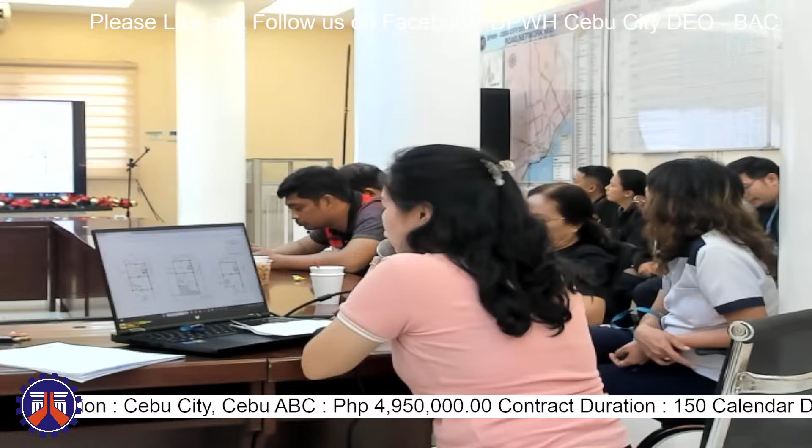For its scope of works, it contains the installation of the built-in cabinet at ground floor, office space, and installation of wall partitions also at ground floor, second floor, and third floor level.

And next is removal and replacement of ceiling incorporating electrical works, and then removal and replacement of CRs, all CRs from ground floor to third floor. And then extension of the second floor level for Barangay Captain's Office.

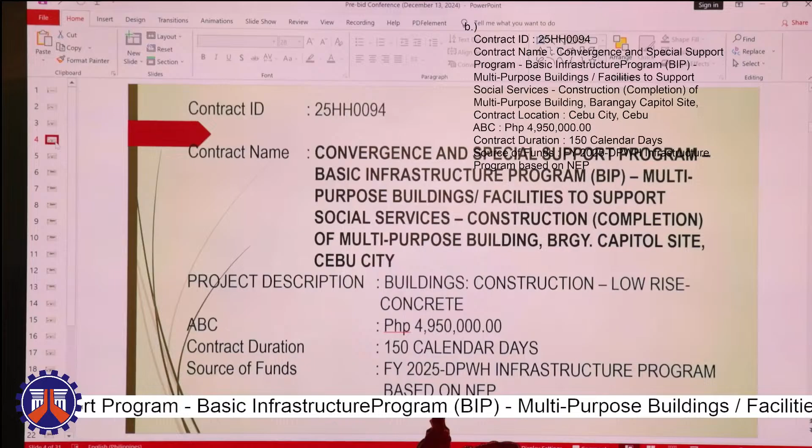So that's all for Barangay Sambag Dos. Next project, contract ID 25HH0094 with contract name, Convergence and Special Support Program, Basic Infrastructure Program, multipurpose building facilities to support social services, construction completion of multipurpose building, Barangay Capitol Site, Cebu City. Project description, building construction, low-rise concrete, with approved budget contract, 4,950,000. Contract duration is 150 calendar days, and its source of funds will be FY 2025 DPWH Infrastructure Program based on NEP.

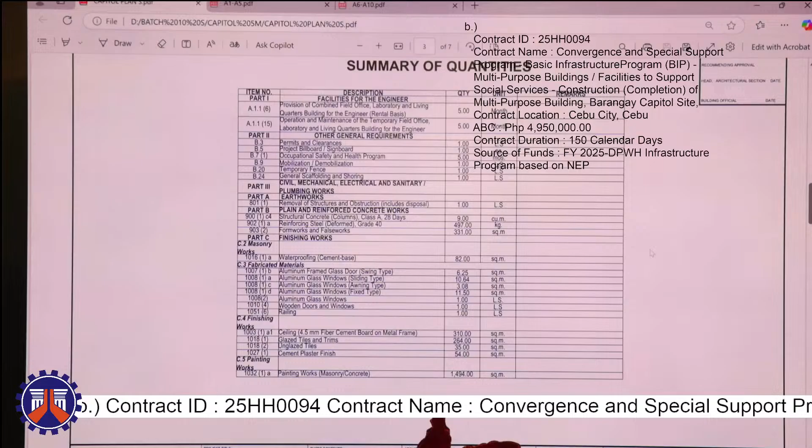So the location of this project is the Barangay Capitol Site, Barangay Hall. Its main scope of works, installation of aluminum frame glass doors, swing type, aluminum glass windows, sliding type, aluminum glass windows awning, aluminum glass windows fixed type, and aluminum windows, wooden doors and railings at the roof deck.

So it's an enclosed area. Currently it's open here, more connection to the existing barangay hall. Installation of railings at the third floor level. That's all for Barangay Capitol Site.

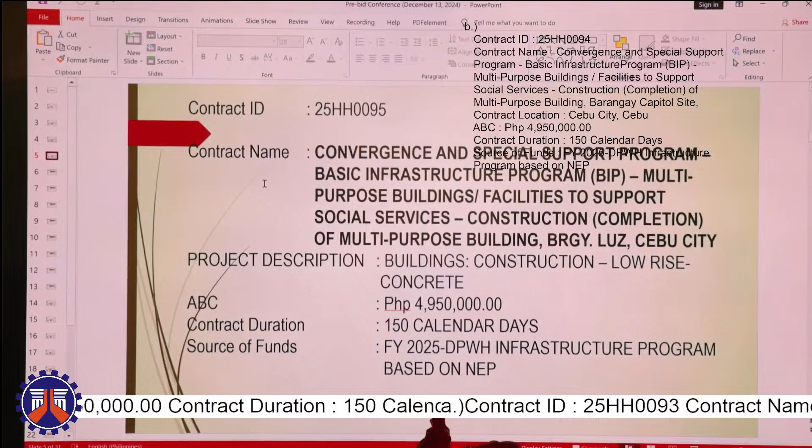Next, contract ID 25HH0095 with contract name, Convergence and Special Support Program, Basic Infrastructure Program, multipurpose buildings facilities to support social services, construction completion of multipurpose building, Barangay Luz, Cebu City. With project description, construction low-rise concrete. With approved budget contract, 4,950,000. Its contract duration is 150 calendar days, and source of funds will be FY 2025 DPWH Infrastructure Program based on NEP.

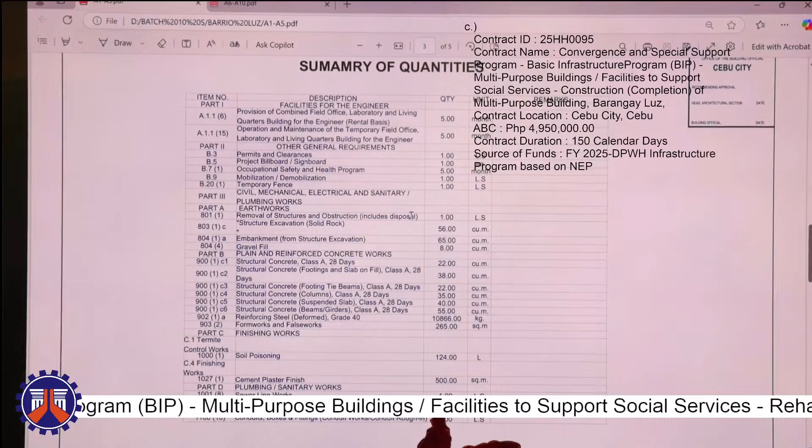For Barangay Luz, the project is located at the Barangay Luz Barangay Hall. So, its main scope of works, removal of existing structures and obstruction, structure excavation, solid rock, embankment from structure excavation, and gravel fill. And for concrete works, you have structural concrete, footings and slab, structural concrete footing tie beams, structural concrete for columns, structural concrete for suspended slab, and structural concrete for beams and girders.

Also for architectural works, we have the cement plaster finish, and then the installation of plumbing and sanitary works for sewer lines, cold water lines, also for electrical works.

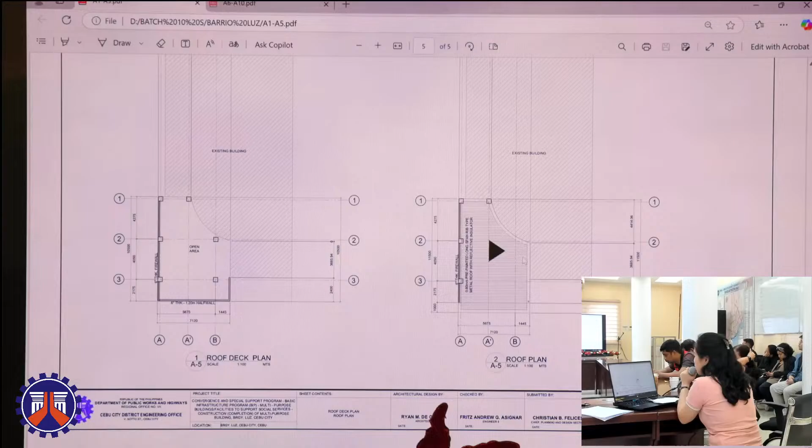So this is an extension building. Ground floor, second floor, and third floor plan, which has an office space. And then the roof deck plan. Also the roof plan. That's all for Barangay Luz. Thank you.

Good morning. I'm here to discuss our next project with contract ID 25HH0096. Contract name, Convergence and Special Support Program, Basic Infrastructure Program, BIP, access roads and/or bridges from national roads leading to major strategic public buildings facilities. Construction of road, Barangay Pulangbato, Cebu City.

Project description, roads construction, PCCP. With the approved budget for the contract, 4,950,000. Our contract duration, 72 calendar days. Source of fund, FY 2025 DPWH Infrastructure Program based on NEP.

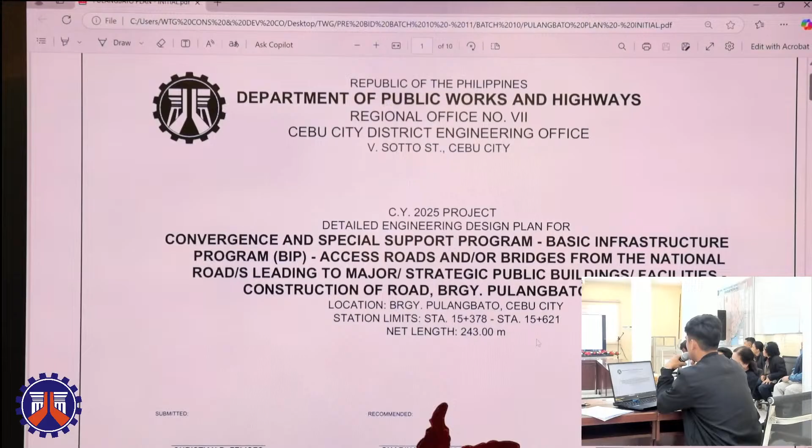Here's our plan. Our station limits starts at 15 plus 378 to station 15 plus 621, with a net length of 243 meters.

The start of our project is the end of our 2024 Pulangbato FMR, and the end of our project is the existing concrete road going to Barangay Guba. We have our exact coordinates for the start and end of our project.

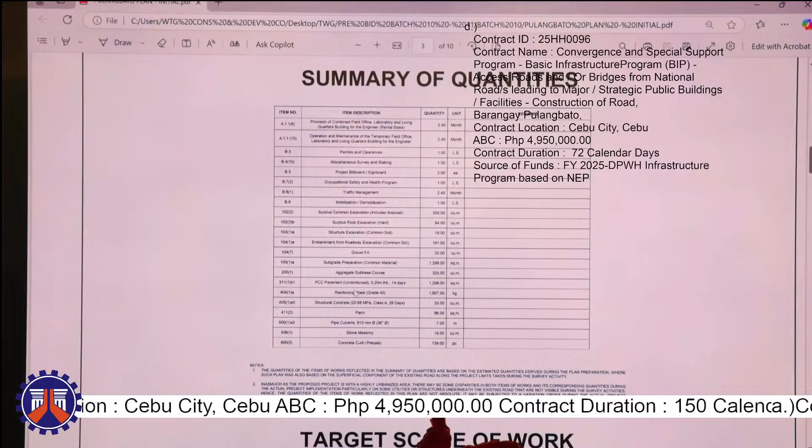These are our scope of works, the items involved in our project. We have surplus excavation, structure excavation, embankment, gravel fill, subgrade preparation, aggregate sub-base course, PCCP 0.20m, 14 days, reinforcing steel grade 40, and structural concrete for our line canal. We also have paint for our curb, pipe culverts for our cross drain, stone masonry, and concrete curb precast. These are the general notes and technical specifications of the items involved in this project.

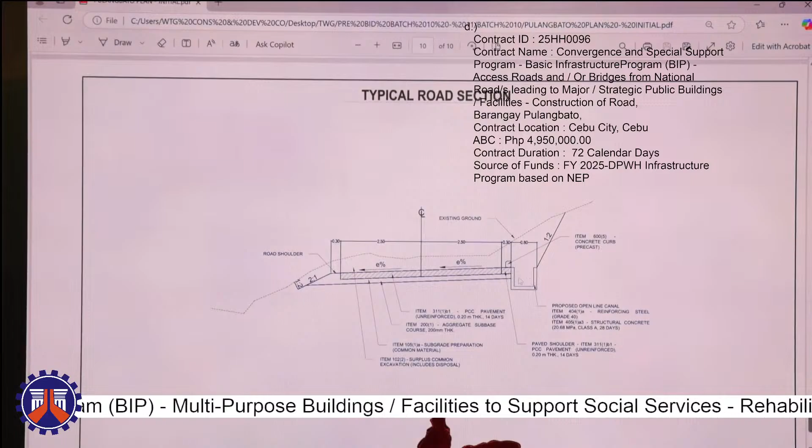Lastly, our typical road section. We have our concrete pavement here and our line canal at the right side. Okay, that's all for Pulangbato.

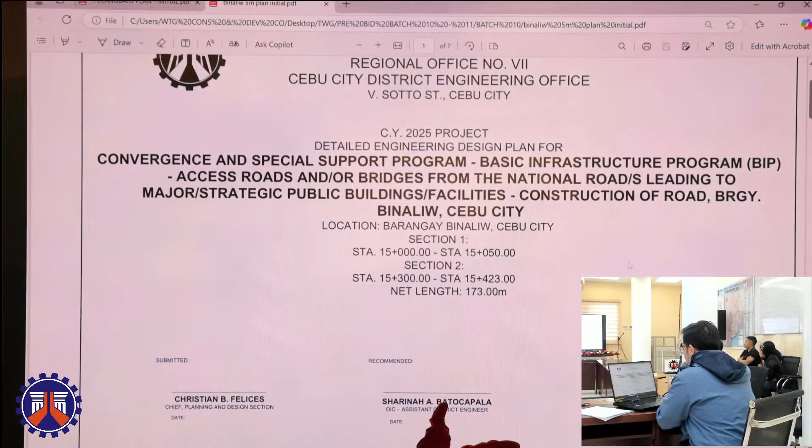This project involves two sections. Section 1 has station limits of 15,000 to 15,050, only 50 meters. Section 2 has station limits of 15,300 to 15,423, with a total net length of 173 meters.

Here we have the summary of quantities. First, removal of actual structures or obstruction, PCCP 0.23 meters thick, surplus common excavation, structure excavation, pipe culvert and drain excavation, embankment from roadway excavation, gravel fill, subgrade preparation, aggregate subbase course, PCCP pavement 0.25 meters thick, 7 days.

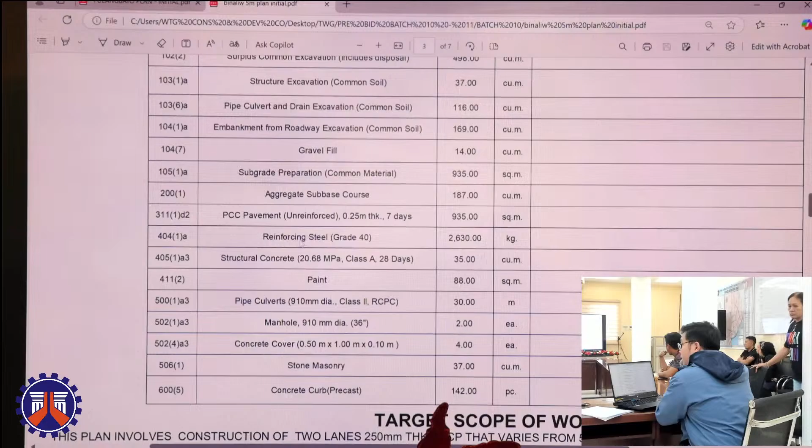For the drainage, we have reinforcing steel grade 40, structural concrete 20.68 MPa, class A, 28 days. We also have paint, pipe culverts, manhole, concrete cover, stone masonry, and concrete curb.

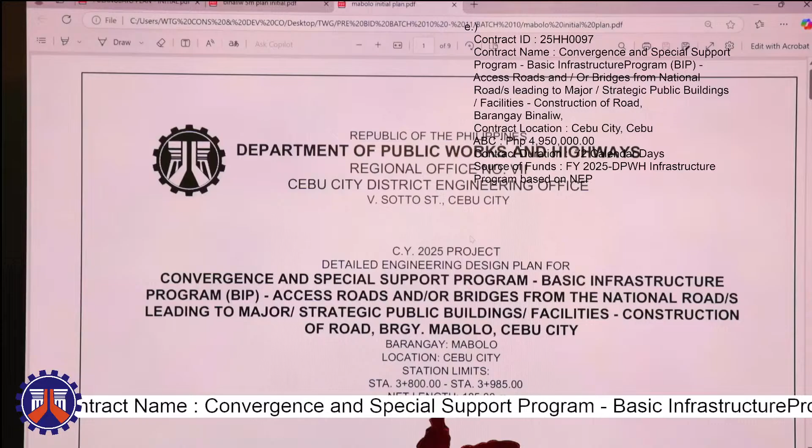Next, with contract ID 25HH0098, Convergence and Special Support Program, Basic Infrastructure Program, access roads and/or bridges from the national roads leading to major strategic public buildings, facilities, construction of road, Barangay Mabolo, Cebu City, with an ABC of 4.95 million and a contract duration of 72 calendar days.

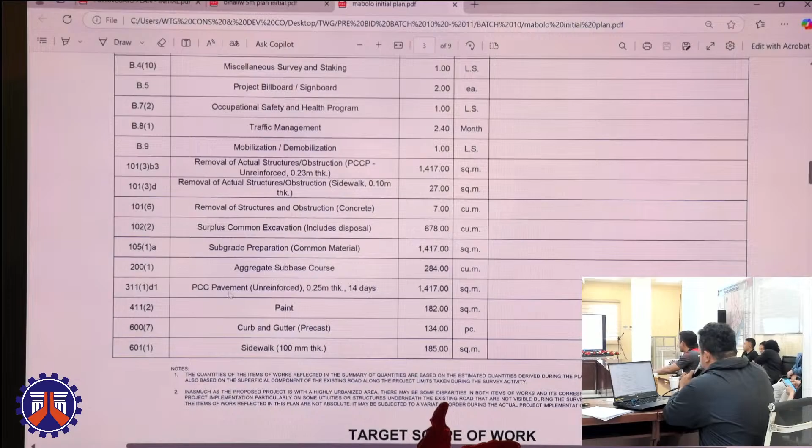This is the summary of quantities of the project. The major scope of work being removal of PCCP, removal of existing sidewalk, removal of existing concrete, surplus common excavation, subgrade preparation, aggregate subbase course, PCCP, paint, curb and gutter, and provision of sidewalk.

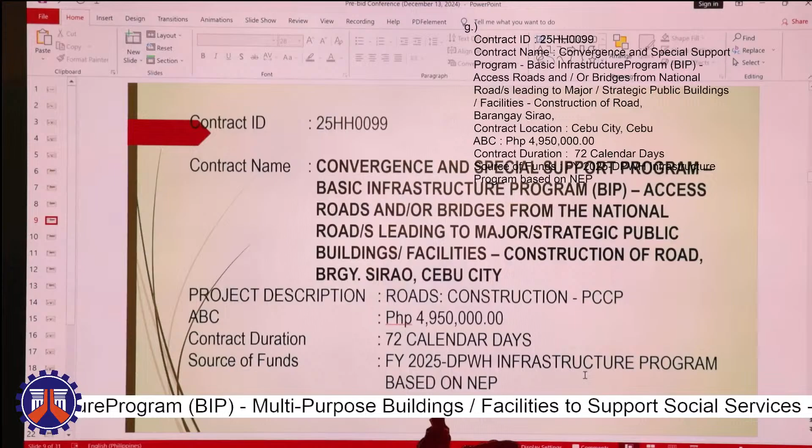Good morning, everyone. I'm here to discuss the project with contract ID 25HH0099, contract name Convergence and Special Support Program, Basic Infrastructure Program, access roads and/or bridges from the national roads leading to major or strategic public buildings or facilities, construction of road, Barangay Sirao, Cebu City. Its project description is roads construction of PCCP with an approved budget of 4,950,000 pesos. Its contract duration is 72 calendar days, and its source of funds is FY 2025 DPWH Infrastructure Program based on NEP.

So here is our plan, and its station limits start from station 17 plus 800 until station 17 plus 975, with a net length of 175 meters.

Here is our summary of quantities with its major scope of works, including surplus common excavation, structure excavation, pipe culvert and drain excavation, gravel fill, subgrade preparation, aggregate subbase course, PCCP 0.2 meter thick, 14 days, reinforcing steel grade 40, structural concrete, paint, pipe culverts, stone masonry, and concrete curb precast.

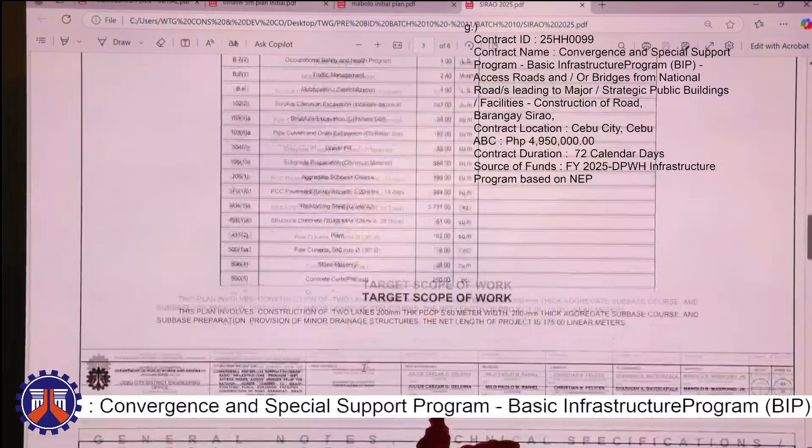Here you will see the general notes and technical specifications included in this project.

And this is our typical road section. You can see there is a proposed drainage for both sides of the road, and its carriageway width is 5.6 meters.

So the next project I will be discussing is the project with the contract ID 25HH0100, with its contract name Convergence and Special Support Program, Basic Infrastructure Program, Access Roads and/or Bridges from the national roads leading to major or strategic public buildings or facilities, construction of road, Barangay Cambinocot, Cebu City.

Project description is roads construction PCCP. Approved budget is 4,950,000 pesos. Its contract duration is 72 calendar days, and its source of funds is FY 2025 DPWH Infrastructure Program based on NEP.

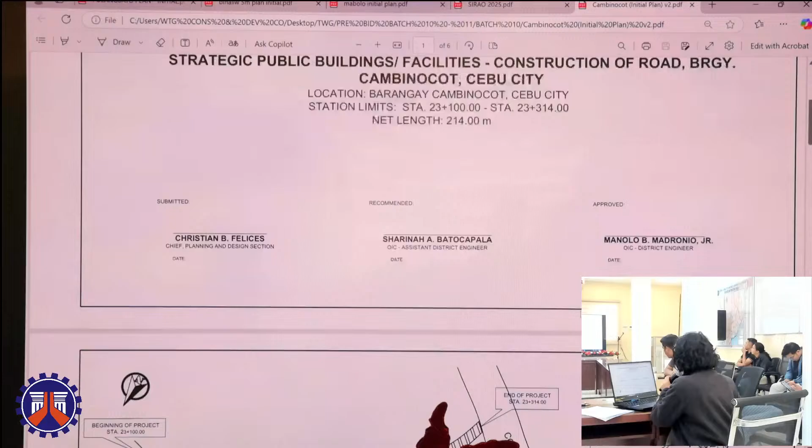So here's our plan. Its station limit starts out from 23 plus 100 until 23 plus 314, and its net length is 214 meters. Here is the location of our project, as well as its geotagged photos for easy navigation to our project.

The major scope of works for this project includes removal of RCPC, surplus common excavation, structure excavation, pipe culverts and drain excavation, gravel fill, subgrade preparation, aggregate sub-base course, PCCP 0.2 meter thick, 14 days, reinforcing steel grade 40, structural concrete, paint for our curb, pipe culverts, stone masonry, and concrete curb precast.

And here is our general notes and technical specifications included in the project.

Lastly, here is our typical road section. There is a drainage on the right side of the road, and yeah, that's all.

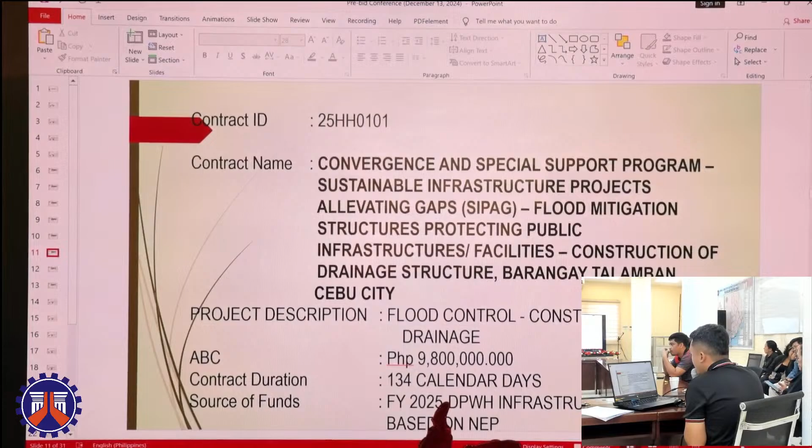With an ABC of 9,800,000 with a contract duration of 134 calendar days. Source of funds is FY 2025 DPWH Infrastructure Program based on NEP.

Moreover, for the plan, we have for line 1, station limits from 00 to 0 plus 394. For line 2, we have station limits of 00 to 100 meters with a net length of 888 meters. So for the next page, we have the geotag photos.

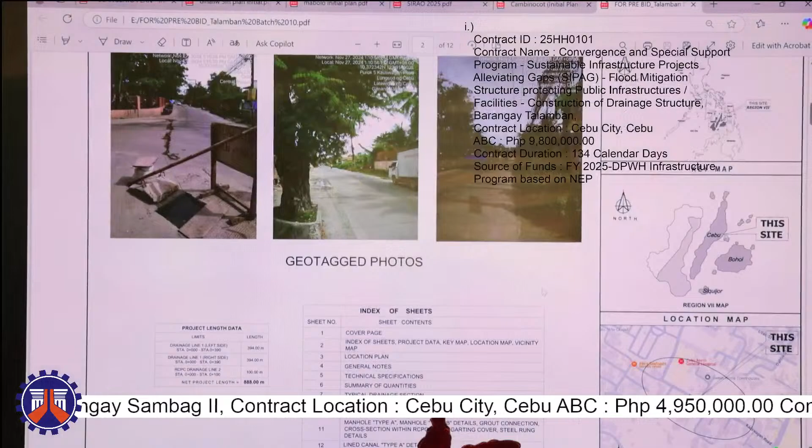And as you can see here, we have the vicinity map wherein you can locate the project in Kauswagan Road at Cebu North General Hospital.

So furthermore, for the major scope of works for this project, we have item 8011, removal of structures and obstruction, reinforcing steel, structural concrete, metal frames and gratings, pipe culverts and drain excavation, embankment, pipe culverts 910 mm diameter, manhole, inlets, concrete cover.

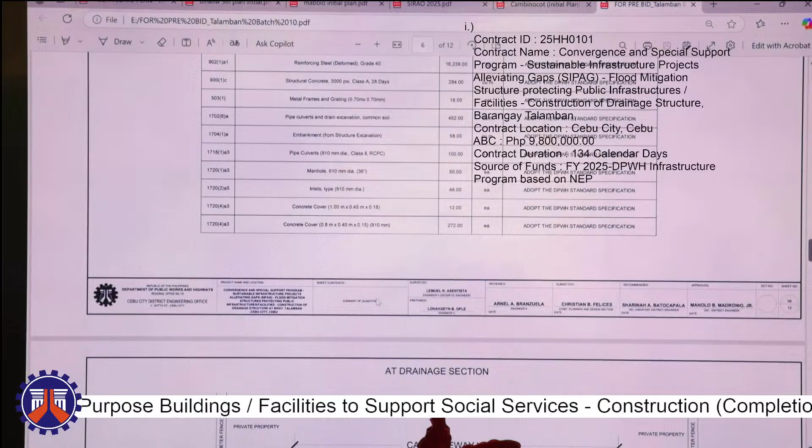And for the typical drainage section details, we have here. And also for the typical sections, we have for the manhole and for the lined canal. So that would be all for this project.

Next, we have Barangay Mabolo. Pit-os. Okay.

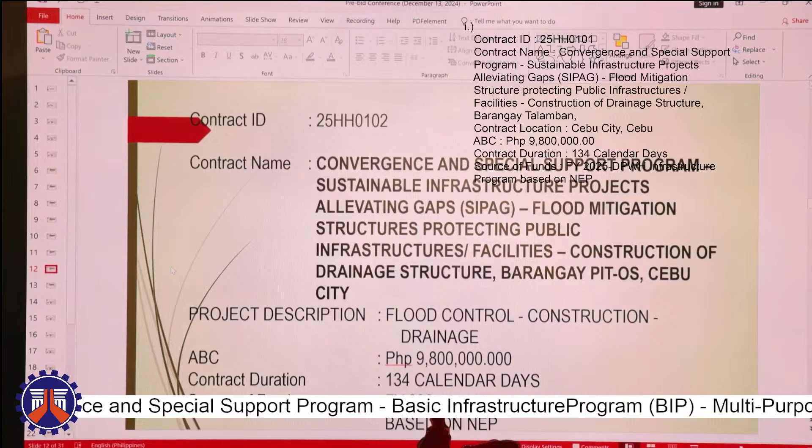Good morning, everyone. I will be the one to discuss contract ID 25HH0102, Convergence and Special Support Program, Sustainable Infrastructure Projects Alleviating Gaps, Flood Mitigation Structures Protecting Public Infrastructures Facilities, Construction of Drainage Structure, Barangay Pit-os, Cebu City. Project description, flood control construction drainage with an ABC amount of 9.8 million.

Contract duration, 134 calendar days. Source of funds, FY 2025 DPWH Infrastructure Program based on NEP.

So for this project, the location is Barangay Pit-os, Cebu City, mainly sa Villa del Rio 2. So we have drainage line 1 and 2. For line 1, we have 393 meters. Line 2, 390 meters, total of 783.

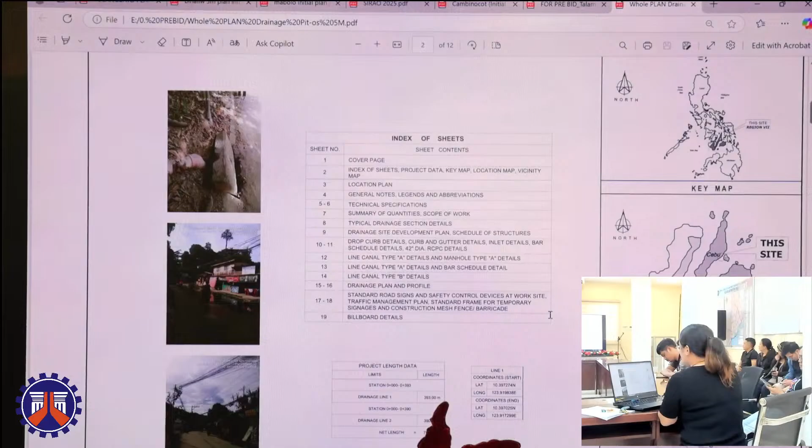So the coordinates for the location is also provided. So mo ni siya ang location sa project, from Villa del Rio 2 going to Pulang Bato Bridge.

Then for the scope of work, we have structural concrete, reinforcing steel, metal frames and gratings, curb and gutter, shoring, manhole inlets, and concrete cover for the line canal as the design of this project. The details of the line canal is also provided in the plan. So that's all.

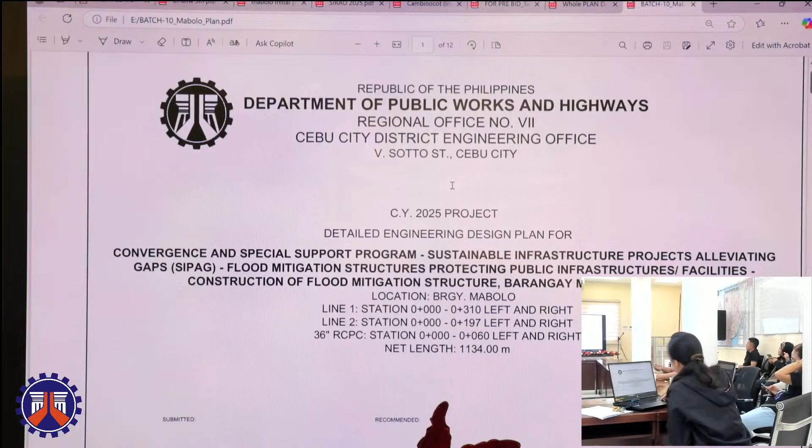This is our plan for Barangay Mabolo. Line 1 station starts from 0 plus 0 to 0 plus 310 on both sides. Line 2 station starts 0 plus 00 to 0 plus 197 on both sides. And for 36 inch RCPC, station starts from 00 to 060 left and right, with a total net length of 1,134 meters.

This is our location with geotagged photos, and the site is located along 10F Gochan Street and Tres Borces Padres Street.

This is the general notes and technical specifications, and for the main scope of works: removal of structures and obstructions including disposal, reinforcing steel deformed grade 40, structural concrete 3000 psi class A 28 days, metal frames and grating, curb and gutter precast, sidewalk, pipe culverts and drain excavation, common soil, embankment from structure excavation, pipe culverts, manhole 910mm dia, and inlets, concrete cover for line 1 and concrete cover for line 2.

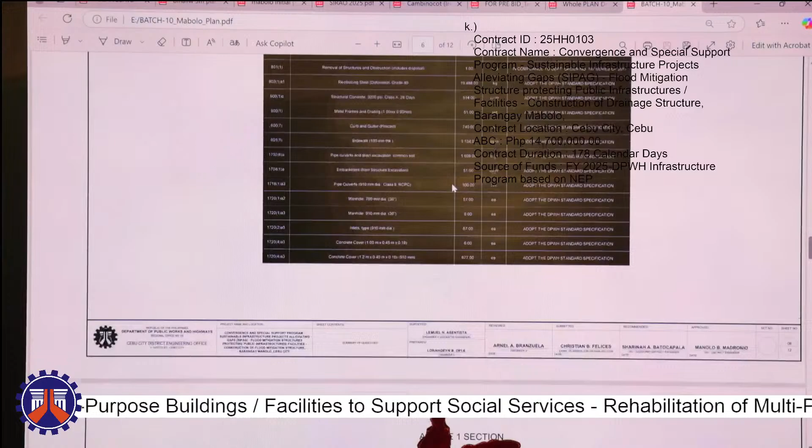This is our typical drainage section details for line 1 and 2, and this is for the 36 inch RCPC section. And this is our road work, road signs and safety. And this is our manhole details and concrete cover for the line canal. Thank you.

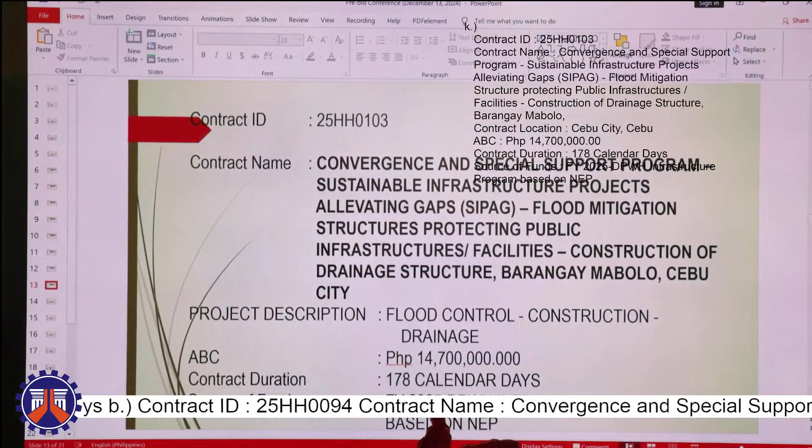Next project, contract ID 25HH0104, contract name Convergence and Special Support Program, Basic Infrastructure Program, BIP, multipurpose building facilities to support social services, rehabilitation of multipurpose building, Barangay Bacayan, Cebu City, with project description building repair. ABC amount is 4,950,000. Contract duration is 150 calendar days, and source of funds will be FY 2025 DPWH Infrastructure Program based on NEP.

For Barangay Bacayan, the project will be at the Barangay Bacayan Gym or covered court.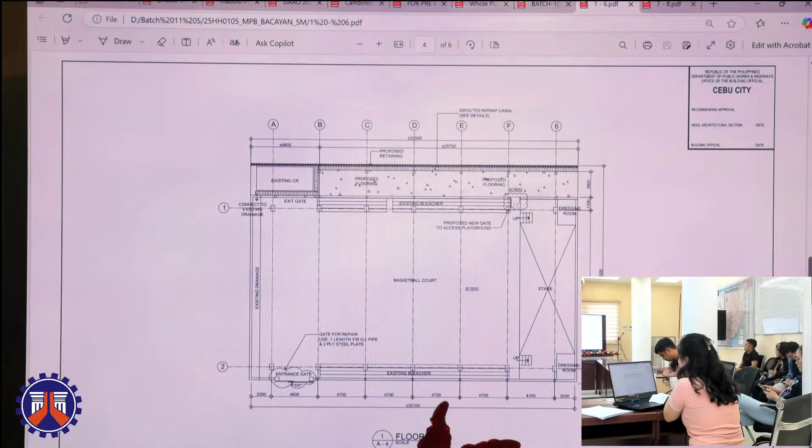Also, gate connecting to existing - sorry. Also, removal and replacement of the existing main gate of the covered court.

And then rubberized painting for the whole area of the basketball court. Next will be the installation of louver at the rear elevation. And painting of the steel trusses. That's all for Barangay Bacayan.

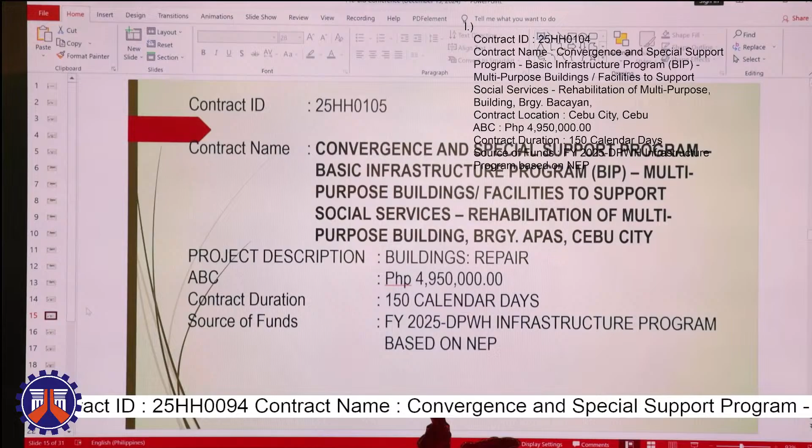Next is contract ID 25HH0105. Contract name: Convergence and Special Support Program, Basic Infrastructure Program, Multipurpose Buildings, Facilities to Support Social Services, Rehabilitation of Multipurpose Building, Barangay Apas. Project description is building repair. ABC amount is 4,950,000. Contract duration is 150 calendar days. Source of funds will be FY 2025 DPWH Infrastructure Program based on NEP.

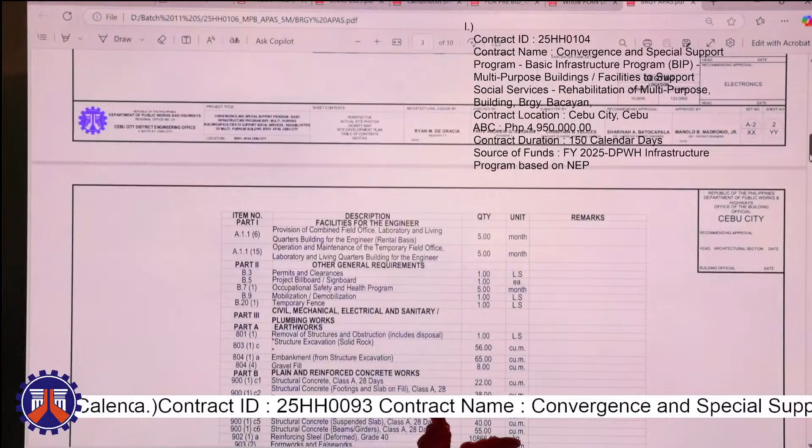The project is located at Barangay Apas, Barangay Hall. There will be installation of roll-up doors and installation of walls at the ground floor or parking space area. Also painting of interior and exterior walls, ground, second, third, and fourth floor, up to roof deck.

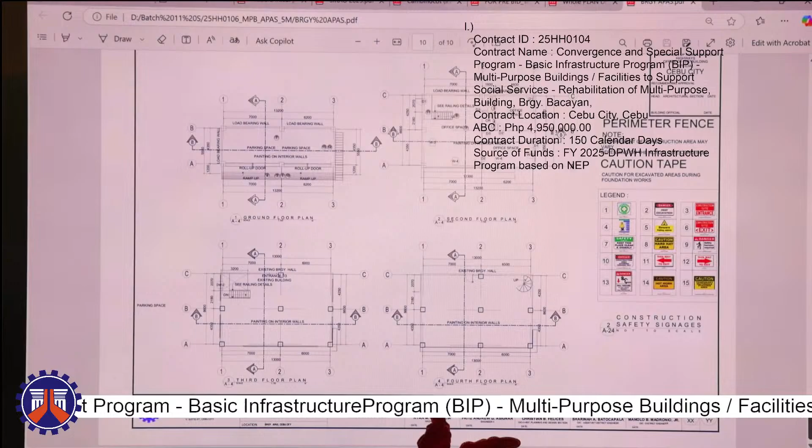Next is to enclose the roof deck area with windows, fixed and awning windows, and then painting of exterior walls, and also for electrical works, remove and replace all lighting fixtures. That's all for Barangay Apas.

Next is contract ID 25HH0106, contract name Convergence and Special Support Program, Basic Infrastructure Program, Multipurpose Building, Facilities to Support Social Services, Rehabilitation of Multipurpose Building, Barangay Banilad, with project description building repair. ABC amount is 4,950,000. Contract duration is 150 calendar days, and source of funds FY 2025 DPWH Infrastructure Program based on NEP.

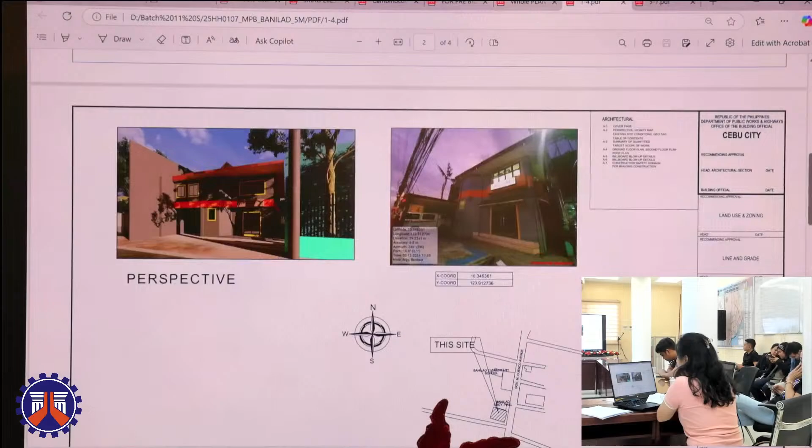For Barangay Banilad, the location of the project will be at the Barangay Hall, mainly at the daycare and dental area of the building. So there will be installation of wall partitions in the ground floor area and also on the second floor for daycare.

And then on the second floor for the dental clinic, doctor's clinic, and receiving area. And also to provide a room for the nurses. There will also be removal and replacement of tiles for the stairs. And also the removal of a wall and replacement of the existing fixtures.

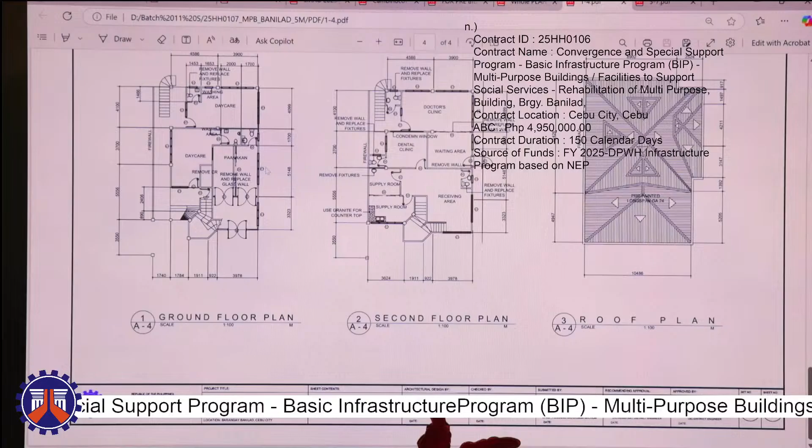So that's all for Barangay Banilad. Next, contract ID 25HH0107, Convergence and Special Support Program, Basic Infrastructure Program, Multipurpose Buildings Facilities to Support Social Services, construction of multipurpose building, Barangay Malubog, Cebu City, with project description construction of low-rise concrete. ABC amount is 4,950,000 with contract duration 150 calendar days. Its source of funds will be FY 2025 DPWH Infrastructure Program based on NEP.

For Barangay Malubog, this is a construction of a new covered court. A geotag is provided here since it's not close to their barangay hall.

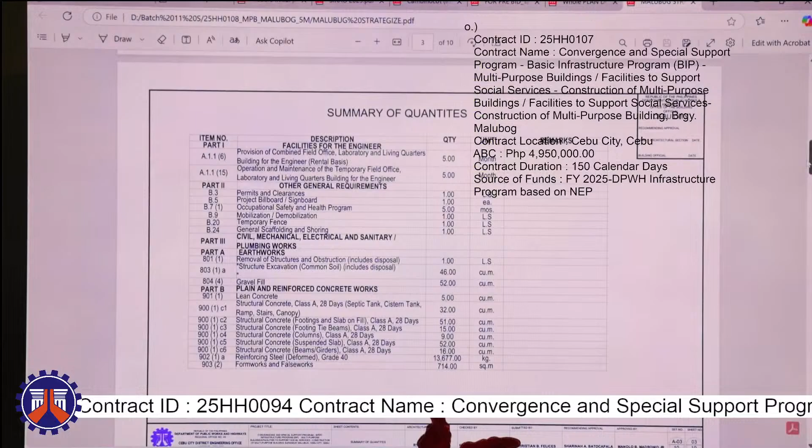So the main scope of works: removal of structures and obstruction, structure excavation, and then lean concrete. Next is structural concrete for the septic tank, cistern, and ramp, stairs, and canopy. Next is the footing and slab on fill. Next is structural concrete for footing, tie beams, columns, suspended slab, beams and girders, and also reinforcing steel deformed grade 40.

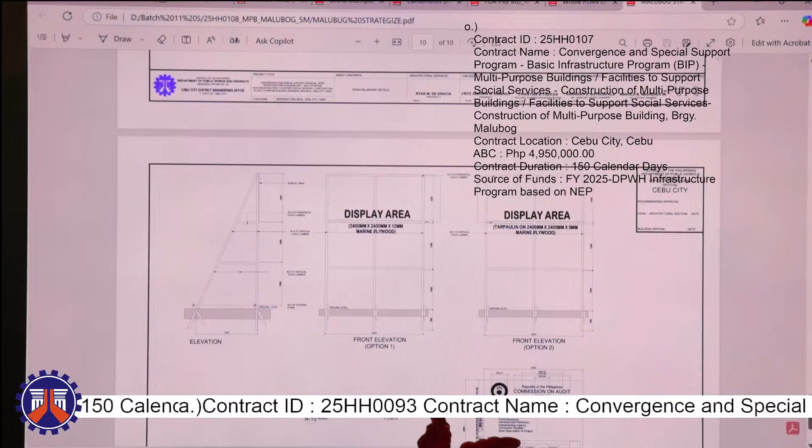Next, contract ID 25HH0108, Convergence Special Support Program, Multipurpose Building Facilities to support social services, construction completion of Multipurpose Building Package A, Barangay Labangon, Cebu City. Project description is construction of low-rise concrete building. Approved budget for contract is 4,950,000 with contract duration 150 calendar days. Source of funds is FY 2025 DPWH Infrastructure Program based on NEP.

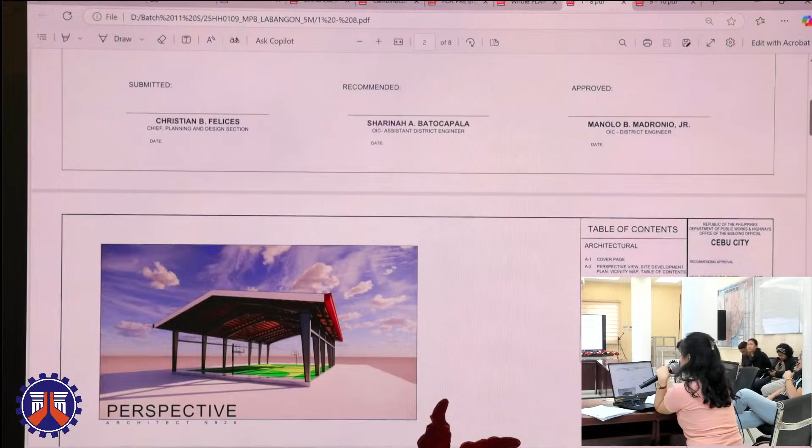So for Barangay Labangon, this is construction completion of their covered court. The main scope of works consists of structural works such as removal of structures, structural excavation, embankment and gravel fill, structural concrete footings and slabs, structural concrete for columns, beams and girders, and reinforcing steel deform grade 40, also formworks. Then electrical works: installation of conduits, wirings, and lighting fixtures for the covered court.

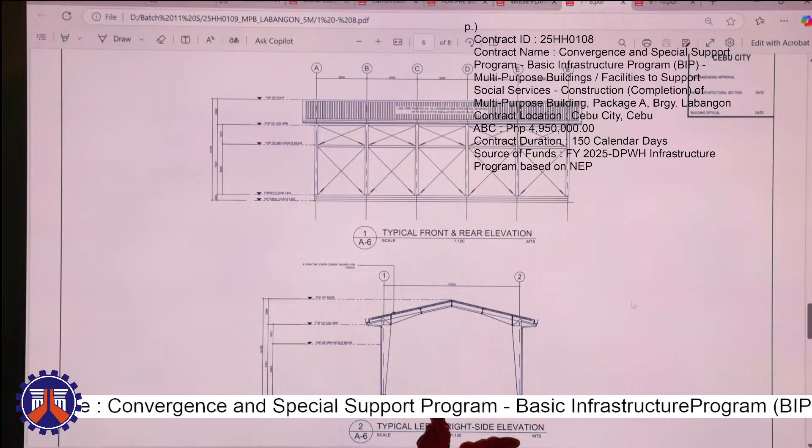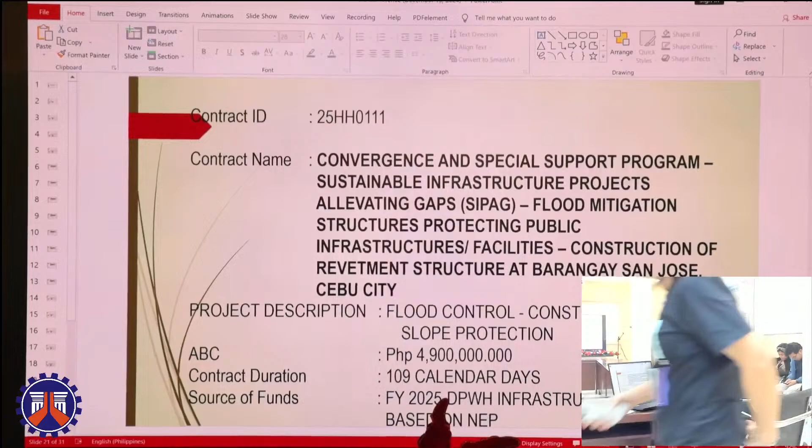So for the drainage project, revetment project, we have 25HH0111, Convergence and Special Support Program, Sustainable Infrastructure Projects, Flood Mitigation Structures, Protecting Public Infrastructure Facilities, Construction of Revetment Structure at Barangay San Jose, Cebu City, with project description of flood control construction slope protection, ABC amount of 4.9 million, 109 calendar days, FY 2025 DPWH Infrastructure Program based on NEP as source of funds.

For this project, the location is section 1020 plus 045, total net length of 45 meters, within Barangay San Jose. This is an FMR project for slope protection, and it connects further along. Coordinates for the location are also provided. The scope of work aims to provide slope protection structure, section 1, with total length of 45 meters, composed of reinforcing steel, structural concrete, and stone masonry. That's all for the San Jose project.

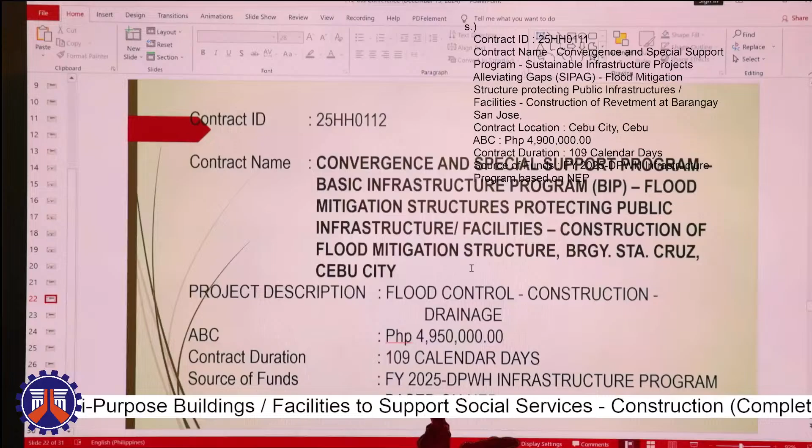The next is 25HH0112, Convergence and Special Support Program, Basic Infrastructure Program, Flood Mitigation Structures, Protecting Public Infrastructure Facilities, Construction of Flood Mitigation Structure, Barangay Santa Cruz, Cebu City, flood control, construction of drainage, with 4,950,000 as ABC amount, contract duration 109 calendar days, source of funds FY 2025 DPWH Infrastructure Program based on NEP.

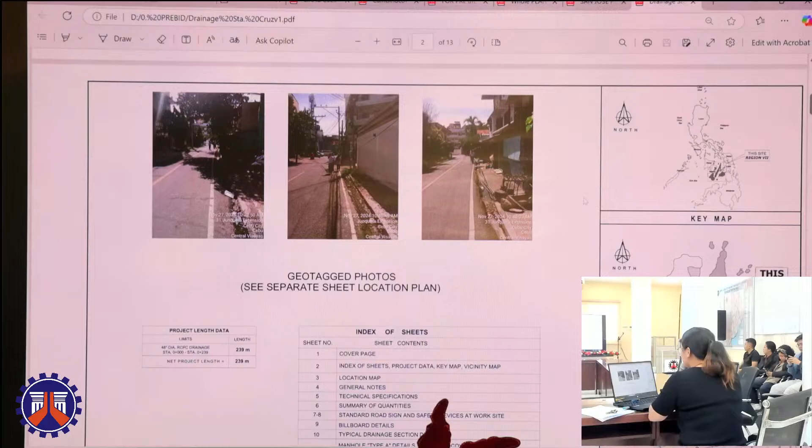This project is located at corner Ramos, beside City Suites. The scope of work is 48 diameter RCPC, station 0 to 239, total length of 239 meters, along Junquera extension. The project starts at City Suites until corner Pelaez extension, then goes toward Ramos.

For the summary of quantities, we have reinforcing steel, structural concrete, metal frames and grating, curb and gutter, sidewalk, embankment, and manhole. Details are also provided for this one.

For the next project, we have 25HH0114, Convergence and Special Support Program, Basic Infrastructure Program, Flood Mitigation Structures, Protecting Public Infrastructure Facilities, Construction of Flood Mitigation Structure, Barangay Carreta, Cebu City. Project description: flood control, construction of drainage. ABC amount 4,950,000. Contract duration 109 calendar days. Source of funds FY 2025 DPWH Infrastructure Program based on NEP.

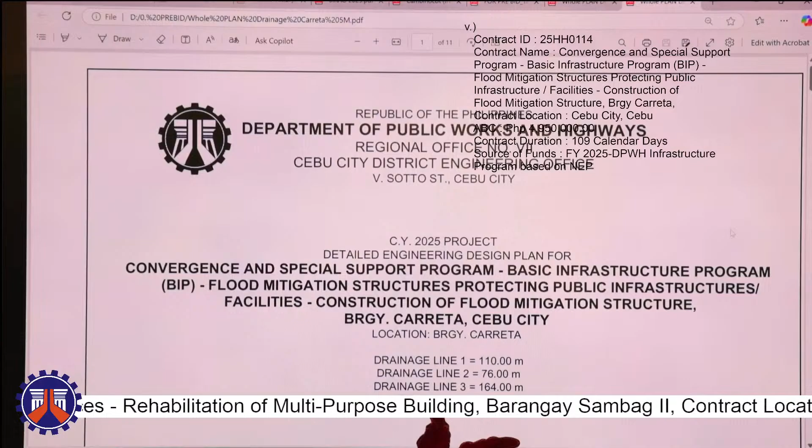For the scope of work: structural concrete, reinforcing steel, metal frames and grating, shoring, manhole and concrete cover. This shows the design, a lined canal. That's all. Thank you.

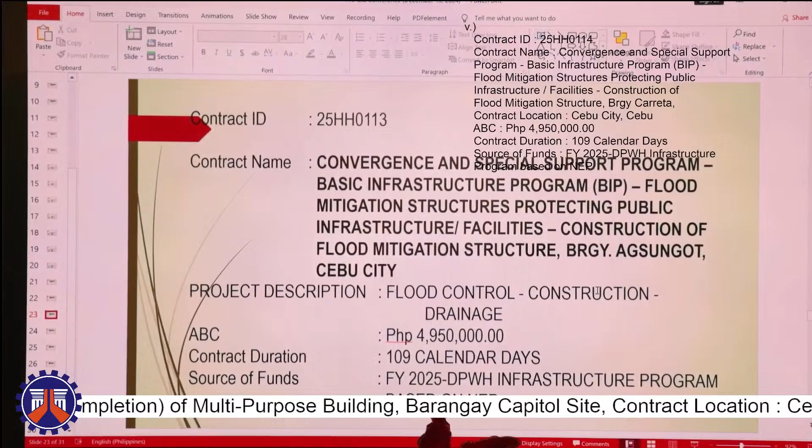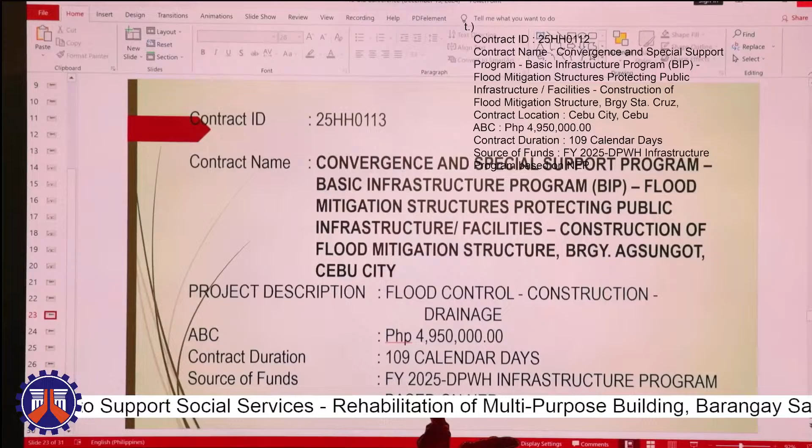Good morning, everyone. I'm Engineer Gamali, and I'm here to discuss the project with contract ID 25HH0113, contract name Convergence and Special Support Program, Basic Infrastructure Program (BIP), Flood Mitigation Structures Protecting Public Infrastructure Facilities, Construction of Flood Mitigation Structure, Barangay Agsungot, Cebu City. Project description is flood control construction of drainage with an ABC amount of 4,950,000 pesos. Contract duration is 109 calendar days, and source of funds is FY 2025 DPWH Infrastructure Program based on NEP.

Again, the location is situated at Barangay Agsungot with station limits 00 to 043.90, with a net length of 43.90 meters.

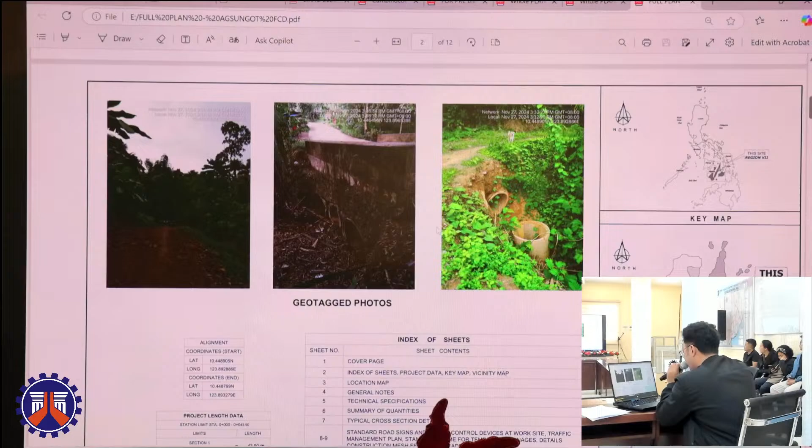For correction, this is not a drainage, this is a revetment structure. Here are the geotag photos with the alignment and coordinates to specify with the index of sheets, and here is the location plan. As you can see, the left side is towards Agsungot and the right is Cambinocot. Stations start at 00, then to 43.90 meters.

For the scope of work, it has reinforcing steel grade 40, structural concrete 3,000 PSI Class A 28 days, pipe culverts and drain excavation, common soil, and stone masonry. Here is a typical cross-sectional detail.

As you can see, this is a proposed head wall, stone masonry, proposed slope protection structure, and a carriageway width along its right section.

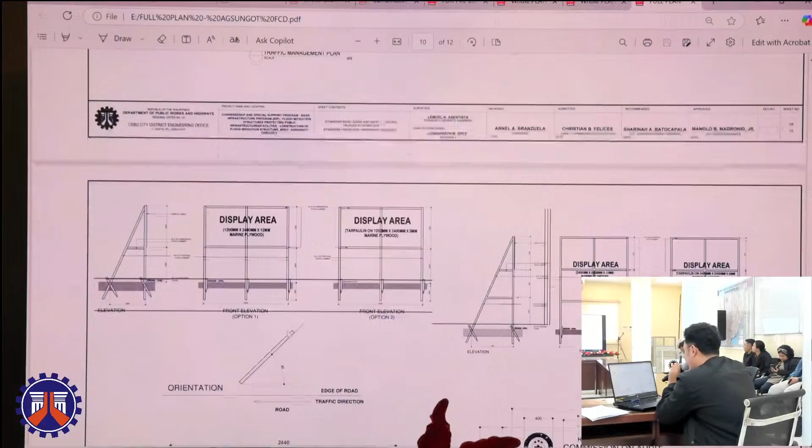Here are the schedule of structures and the typicals for the details of beam, footings, columns, and stone masonries. That'll be all for this project. Thank you.

So for the next FCD project, we have the contract ID 25HH0115, with a contract name of Convergence and Special Support Program, Basic Infrastructure Program (BIP), Flood Mitigation Structures Protecting Public Infrastructure Facilities, Construction of Flood Mitigation Structure at Barangay Sambag Uno, Cebu City, with a project description of flood control construction, drainage, with an ABC of 4,950,000.

With calendar days of 109. Source of funds is FY 2025 DPWH Infrastructure Program based on NEP. So for the plan, we have 3 lines here.

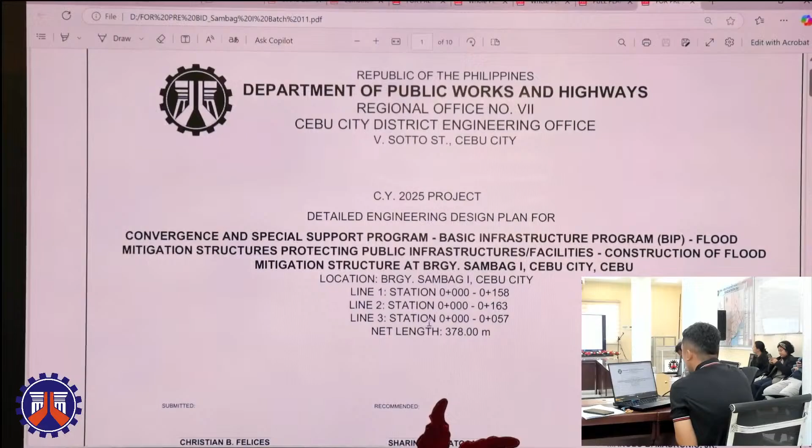For line 1, we have station limits from 00 to 158 meters. For line 2, we have station 00 to 163 meters. For line 3, we have 00 to 57 meters, with a total net length of 378.

So for the next page, we have the geotag photos and location plan. For this project, you can locate it at Southwestern University PHINMA, across AB Aznar Street. We have here the general notes for this project and also the technical specifications.

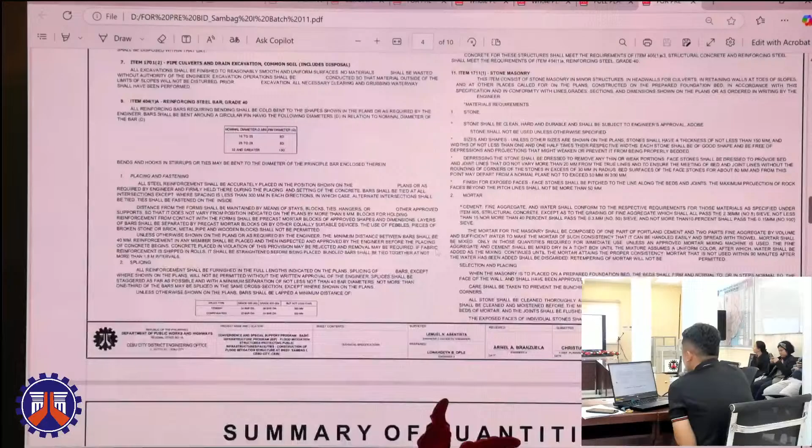For the summary of quantities, we have the major scope of works here: removal of structures and obstruction, reinforcing steel, structural concrete, metal frames and grating, pipe culverts and drain excavation, embankment, pipe culverts, manhole, and concrete cover.

So we have here the typical drainage section details and also the details for manhole and line canal. That would be all for this project. Next we have Barangay Ermita.

Hello everyone, I'm here to discuss the contract ID 25HH0116 with the contract name Convergence and Special Support Program Basic Infrastructure Program BIP Flood Mitigation Structures Protecting Public Infrastructure or Facilities Construction of Flood Mitigation Structure at Barangay Ermita, Cebu City with the project description of flood control construction.

Drainage with an ABC amounting to 4,950,000 pesos with a contract duration of 109 calendar days. The source of funds is FY 2025 DPWH Infrastructure Program based on NEP.

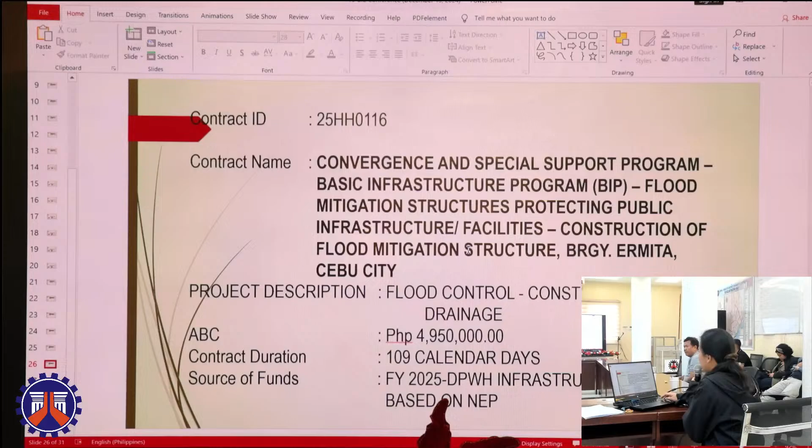So for Barangay Ermita, line 1 station starts from 00 to 300 meters. Line 2 starts from 00 to 260 meters, with a total net length of 560 meters. The location plan is mainly located on the covered court or the barangay hall of Ermita.

For general notes, and this the technical specifications, and for the summary of quantities or scope of works: removal of structure and obstructions includes disposal, reinforcing steel deformed grade 40, structural concrete 3000 PSI class A 28 days, metal frames and gratings, curb and gutter, precast sidewalk at 100mm thick, and pipe culverts and drain excavation of common soil for manhole, and from manhole for 30 inches diameter and concrete cover for line canal.

And this is the typical carriageway, typical drainage section, for line 1 and line 2. Next is the details of the manhole for line 1 and line 2, and line canal details. That's all.

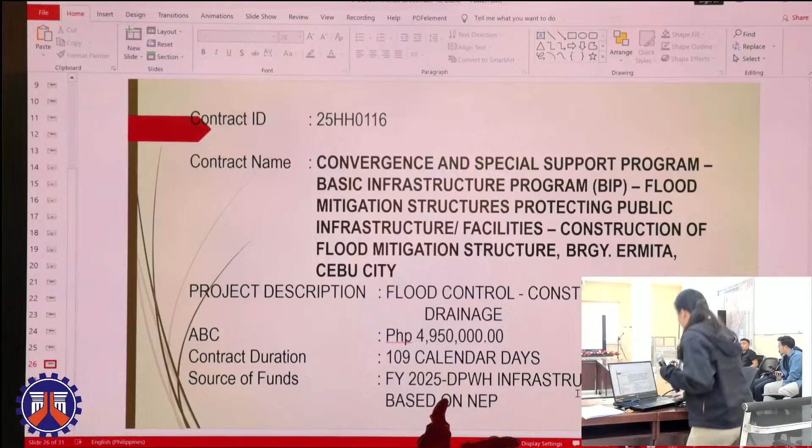So the project is located along Bulacao River, specifically at Barangay Toong. We have station limits of station 0 to 250, with a right river bank length of 250 and a left river bank of 250, with a total net length of 500. The geotag photos are also provided on the plan for the location of the project.

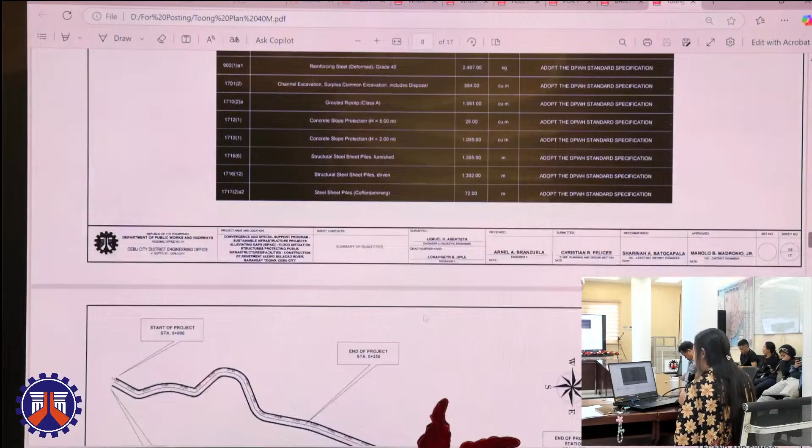We have structural concrete and reinforcing steel bars. We have also removal of structures and obstructions. We have channel excavation. We also provide the geotechnical exploration for this project. So details of the structures for the scope of work of the project are provided in the plan. That's all for this project.

Good noon. Contract ID 25HH0119, contract name: Protect Lives and Properties Against Major Floods, Flood Management Program, Construction Rehabilitation of Flood Mitigation Facilities within Major River Basins and Principal Rivers, construction of revetment structure along Mananga River, Barangay Bonbon, Cebu City. Project description: flood control construction slope protection with approved budget contract of 49 million. Contract duration 261 calendar days. Source of funds: FY 2025 DPWH Infrastructure Program based on NEP.

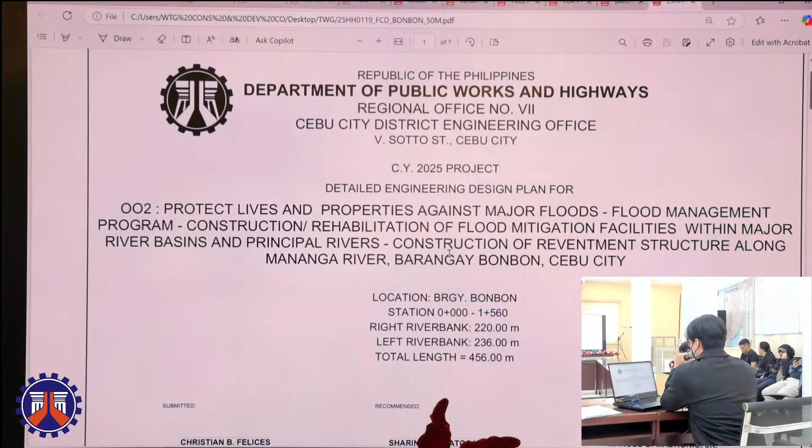The location is along Mananga River, Barangay Bonbon, with station limits of 0 to 1,560. Right river bank length is 220 meters. Left river bank length is 236 meters, with a total length of 456 meters. This is the geotag photos, vicinity maps, key map, index of sheets, and project land data.

The coordinates are also provided. This is the location plan. This is actually an extension of the 2025 project from Bonbon also, so we are just extending it. This is the RC dike, the end, and this is the start of the project. We also provide the U-Ditch, which will end here.

For summary of quantities, we have major items of reinforced concrete slope protection and grouted riprap. This is the typical cross sections and the bid bulletin details. We also have the profile section with the location of the river plan. That's all for this project. Thank you.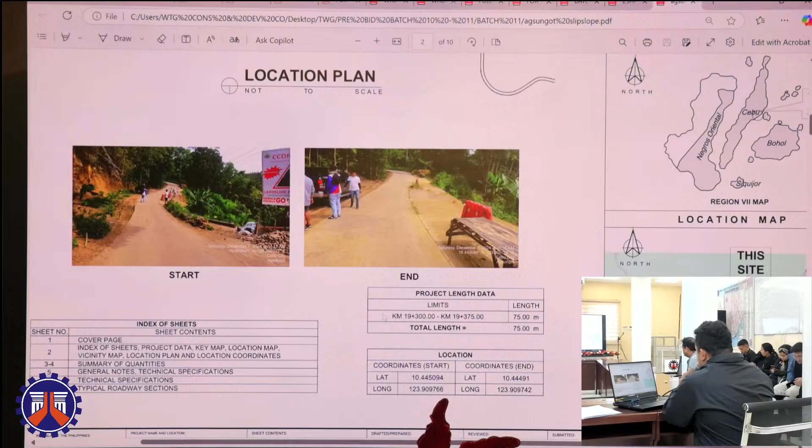This is the location of the project, showing the start and end with specific coordinates. This is the summary of quantities. The major scope of work includes the following items with their specific quantities. The next page shows the general notes and technical specifications, and this would be the typical section of the project.

The next project has contract ID 25HH0120 with contract name: Ensure Safe and Reliable National Road System, Asset Preservation Program, Preventive Maintenance, Tertiary Roads, Cebu Circumferential Road, Salvador Street, with section ID 66CB chainage 00 to chainage 57 and chainage 57 to chainage 1777, and section ID 67CB with chainage 00 to chainage 688, Cebu City.

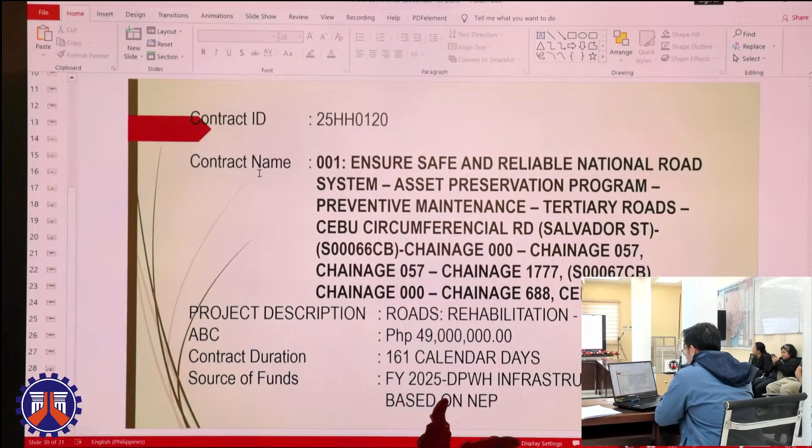Project description: roads rehabilitation with an approved budget of contract of 49 million pesos and a contract duration of 161 calendar days. Source of funds: FY 2025 DPWH Infrastructure Program based on NEP.

This is the location plan of the project. It starts in Guadalupe, Jollibee, and we also have the geotag pictures so that you can easily locate the project. It has a total net length of 2,465 meters.

For the summary of quantities, we have removal of actual structures or obstruction, PCCP unreinforced 0.30 meters thick, surplus common excavation, subgrade preparation, aggregate subbase course, PCCP unreinforced 0.33 meters thick for 3 days, and we also have reflectorized thermoplastic pavement markings, white and yellow.

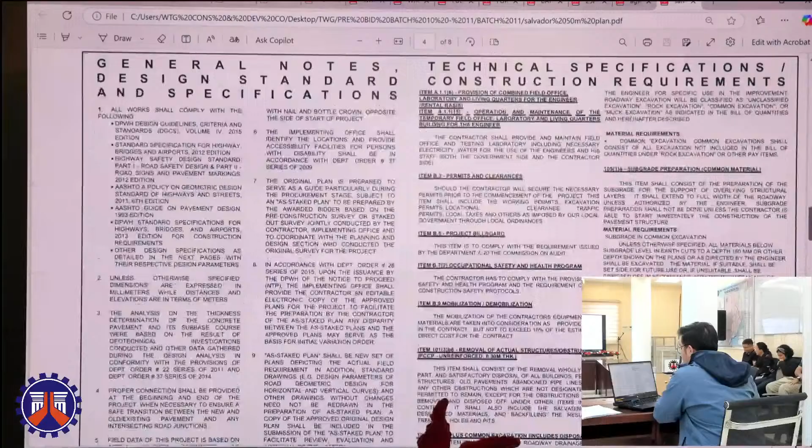Here we have the general notes and specific technical specifications for this project, and lastly we have the typical roadway section. The width of the road is 13.4 meters, and we also have a left side only with 6.8 meters width. That's all for this project.

Our last project for this pre-bid conference has contract ID 25HH0121, contract name: Convergence and Special Support Program, Sustainable Infrastructure Projects, Alleviating Gaps (SIPAG), access roads and/or bridges from national roads leading to major strategic public buildings and facilities, construction of road slope protection, Barangay Buhisan, Cebu City. Project description: roads construction, PCCP. The approved budget for the contract is 96,500,000. Our contract duration is 299 calendar days. Source of fund: FY 2025 DPWH Infrastructure Program based on NEP.

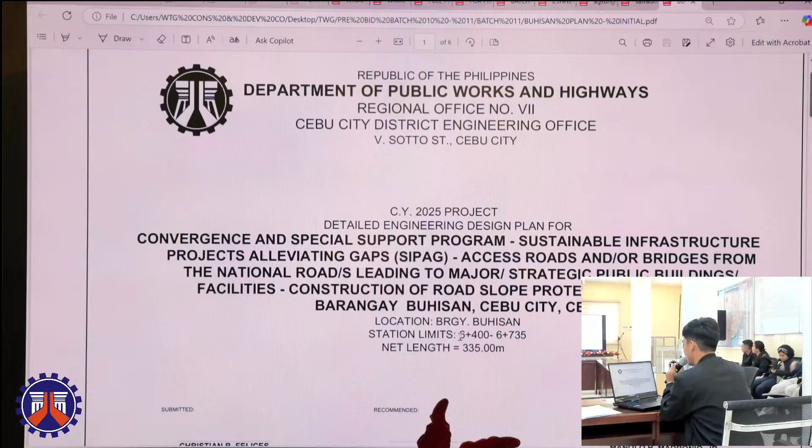Here's our plan. Our project is located at Barangay Buhisan, Cebu City, with station limits from Station 6 plus 400 to Station 6 plus 735, with a net length of 335 meters.

The start of our project is about 640 meters from Buhisan Elementary School. This one is our start. And the exact coordinates of our start and end of the project are also provided here.

Our scope of work involves the removal of PCCP, remove and replace of the concrete pavement, and for our slope protection structure, we have the crib wall.

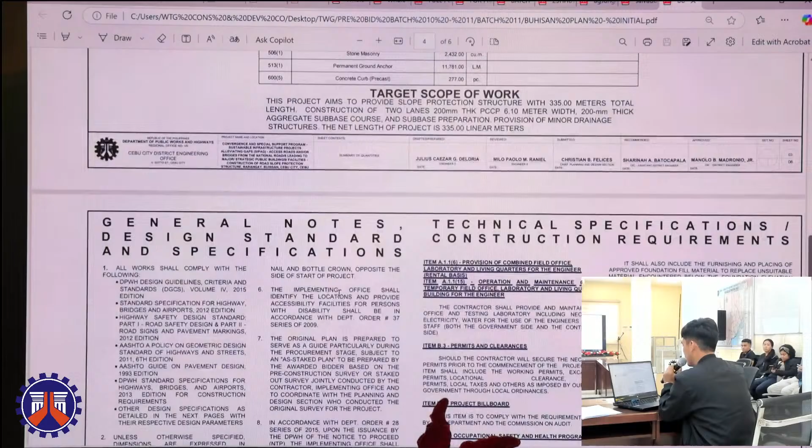These are general notes and technical specifications. And here is our typical road section. This one, we have our PCCP pavement. And on the right side, we have our proposed line canal. And after the line canal, we have our slope protection structure, this one.

And that's all for Barangay Buhisan.

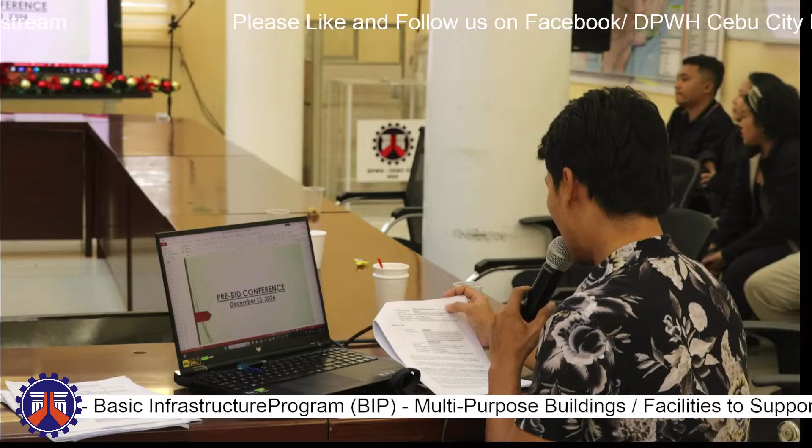Sige. Kini lang mga short reminders. Bidding will be conducted through open competitive bidding procedures using non-discretionary pass or fail criteria in the eligibility check, preliminary evaluation of bids, detailed evaluation of bids, application and award as specified in the 2016 Revised Implementing Rules and Regulations or IRR of Republic Act 9184, otherwise known as the Government Procurement Reform Act.

The contract shall be awarded to the lowest calculated responsive bidder as determined during post-qualification. To be eligible to bid for the contracts, a contractor must have a certificate of registration with PhilGEPS and an approved activation of BIR electronic filing and payment system, and must meet the following major criteria.

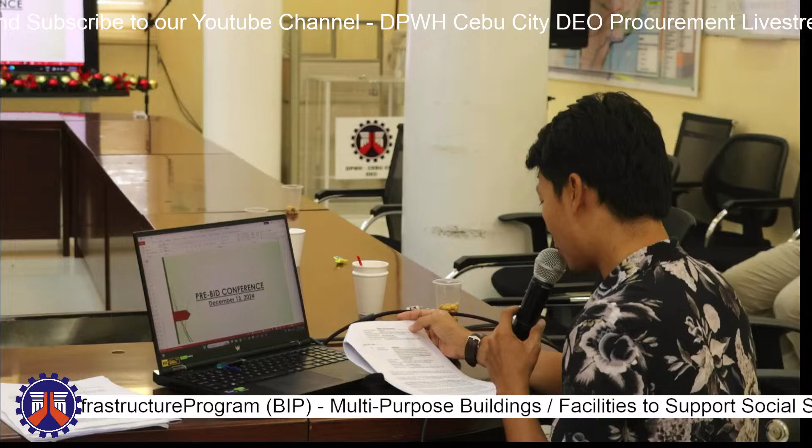A, prior registration with the DPWH. B, Filipino citizen or 75% Filipino-owned partnership or corporation with PCAB license applicable to the type and cost of the contract. C, completion of a similar contract costing at least 50% of ABC. D, net financial contracting capacity at least equal to ABC. And, letter of authority for the representative or liaison officer as reflected in the CRC to submit bids.

Prospective bidders may download the bidding documents if available at the DPWH website and at the Philippine Government Electronic Procurement System or PhilGEPS. Bidders that download bidding documents from the DPWH website shall pay the said fees as stated above on or before the submission of their bid documents. The BAC will issue hard copies of the bidding documents at the same address to eligible bidders upon payment of the fee stated above.

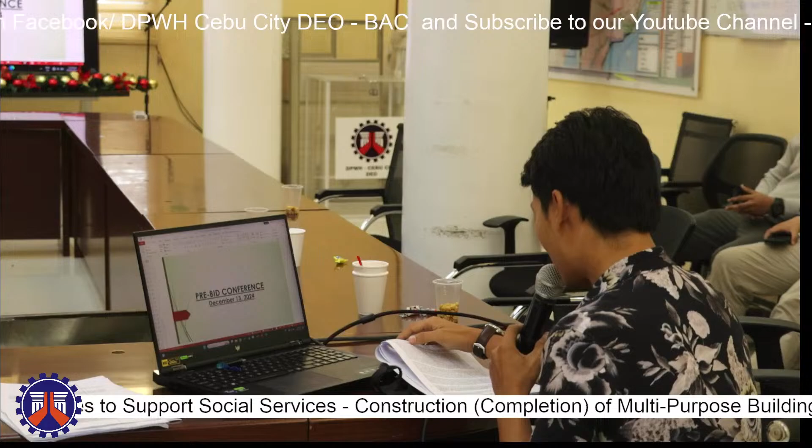As prescribed in Department Order Number 3, Series of 2015, the deadline of submission of contractors' records to the DPWH Civil Works Registry for updating is as follows: A, documents and financial statements must be submitted at least 7 calendar days, and B, technical documents of completed or ongoing projects at least 15 calendar days before the deadline of submission or opening of bids. Bid submission may be done manually or electronically or online.

However, bidders should only select one mode of submission, either manual or electronic. Similar to manual submission, the guidelines for the preparation and submission of an electronic bid are contained in the bidding documents. So I think that's all for the additional information of the bidders.

Thank you. And also, may I add, by the time you submit your technical documents and financial documents during the bidding schedule, please ensure that it is properly bound, because there might be some pages that could be lost, okay? So binded, as it's also stated in the guidelines on the submission of your bids.

Oo, it's also in the checklist. So just ensure that, because by the time you submit, we have also noticed that there are still some participating bidders who are submitting with loose pages. Just ensure that, properly binded.

And also, with respect to the amount of your bid, please be ensured that it shall coincide with the amount in figures. Okay? And also, the address, ha? Properly addressed jud ang inyong sana. And also, of course, contract ID and the contract name. Okay?